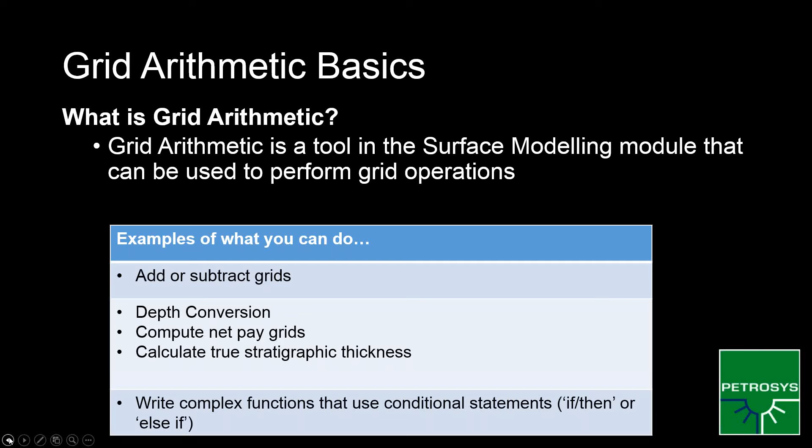This module uses existing grids, so grids that you've already made using Petrosys or .gri files. It also can use constants, which I'll demonstrate, as well as XY coordinates or lists. Your input grids in this module can all have different geometries, but when you go to define your output grid, you'll define a whole new output geometry there.

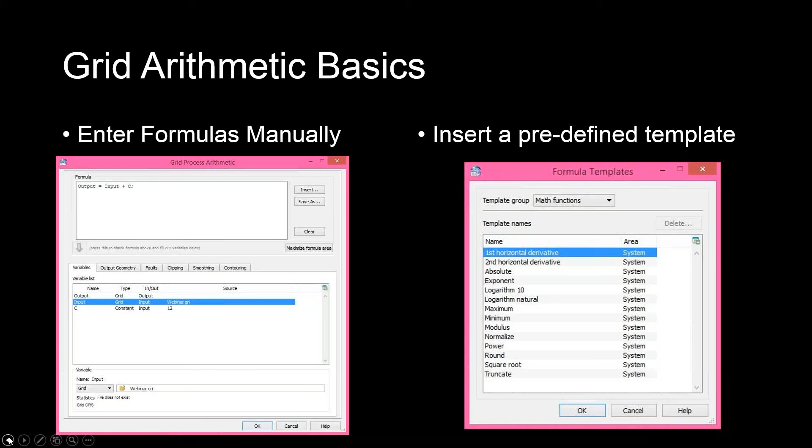So this is what the module looks like. You have the option to enter formulas manually, which can be effective if you are trying to do something a little bit different with your grids. However, Petrosys also comes with a number of predefined templates, and there's a lot to choose from, and we'll go through those briefly during the demo.

So for this particular demonstration, we're going to be using the subcrop formula. It's already an option in Petrosys, and this particular formula has three variables that we're going to be using today. The subcrop is our output grid file, so we'll be naming that and saving that in our Petrosys project directory.

We've got the deeper grid, and this is the grid that is intersected by an unconformity, as well as our unconformity surface. And so we'll specify all of these three variables and be able to run our grid arithmetic using that.

This subcrop formula works by comparing the value of the deeper grid and the value of the unconformity surface at every grid node. And then it's going to take the maximum value of these two and use this value in the new subcrop grid, or the new merged grid.

And you can see here we've got a little cartoon showing you how exactly this is going to work. You can see the deeper grid coming in. It's going to compare those two values and then use the greater one when making our subcrop grid. It'll show up easier in the demo. I've got it all colored out, so we'll be able to see it a little bit better.

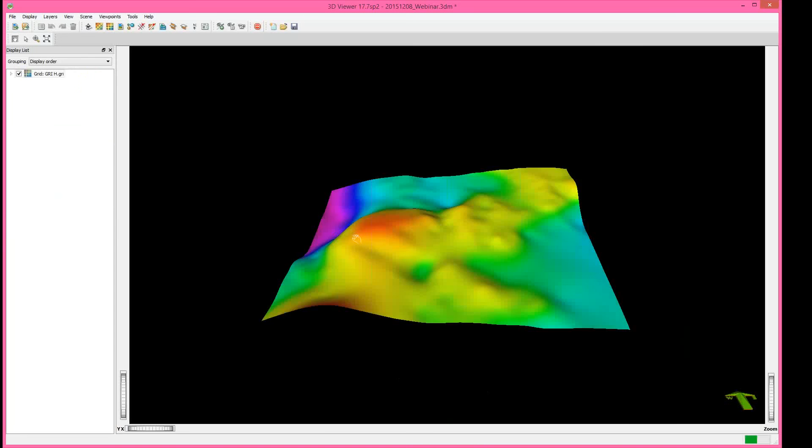I'm going to go ahead and open this. This is just something I made yesterday. Or I guess this is what we're starting with, my apologies. So here in red, you can see that is our subcrop grid. And this surface that's multicolored, I've called this grid H, and it is our unconformity surface.

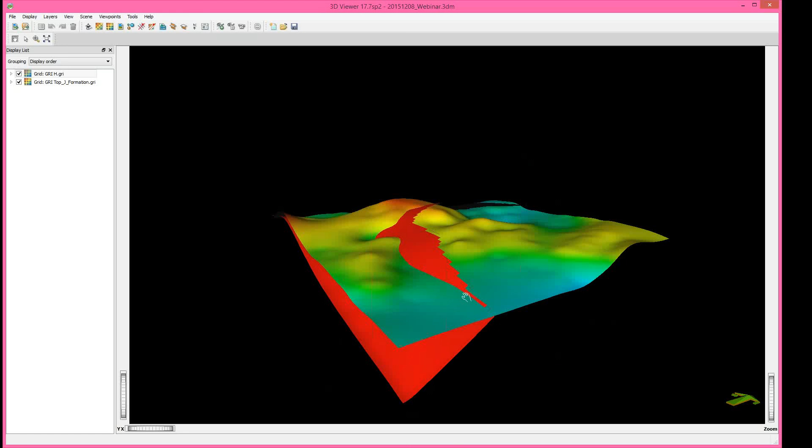So our end result is to take this red grid we have here and merge it with our unconformity surface. And we'll talk about why we want to do that after the demo. So I'm going to go ahead and close that out. To get started, I'm going to open up our surface modeling module.

And to run this grid arithmetic, you want to go to Grid, Processes, Grid Arithmetic. And here you can see all the different options that were in the screen grab in my PowerPoint presentation. But I'm going to go ahead and clear this out. So when you first open this, this is what it's going to look like.

Your formula area may or may not be empty. You have the option to clear it out. And you'll want to insert a template. Here are the templates that I talked about, and you've got quite a few different templates to choose from. If this wasn't a particular demo, we could do math functions. There's depth conversion, simple arithmetic, that's just add, multiply, subtract, divide your grid.

But for this particular option, we're going to use the geoscience examples, and we're going to use the subcrop option. And we're going to do sub C positive. So we'll be picking that formula.

And then when you have your formula chosen and you want to define your variables, you're going to hit this blue button there, and that will bring your variables down here that you can define. I'm going to go ahead and cancel out of this, mostly because I saved a task for us yesterday. So let me get into that.

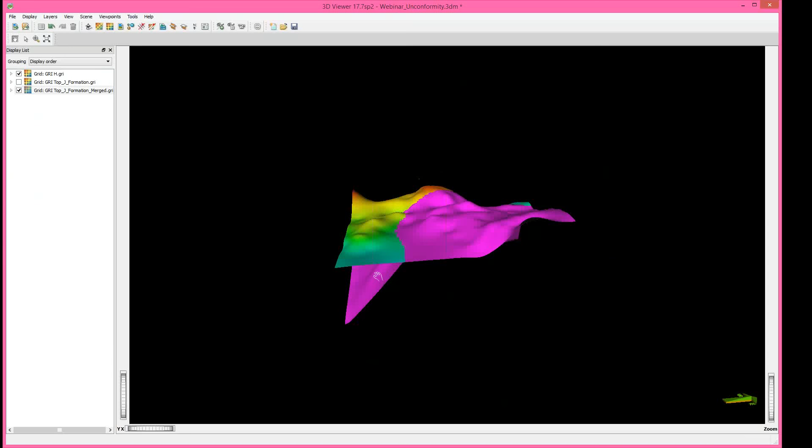All right, so we know that our task is completed. Now I can get back to our 3D viewer. I'm going to go to File, Open. I've saved what this looks like. All right, so if you'll remember, this is what we started with. We've got the unconformity surface and a grid that's intersecting it. But after we've run the task, you can see now that our grid that has intersected that unconformity surface, now we've merged it into one grid. So there's no discontinuities or gaps in here, so I think that looks pretty good.

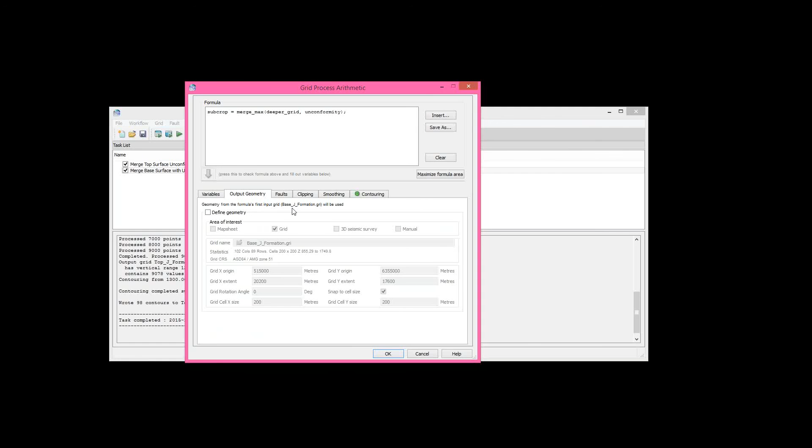All right, so now we also want to merge a dipping surface. So I'm going to go back to our surface modeling module. Let me minimize that quick. And I'm going to open up the second task I have here, and this merges a base surface with our unconformity. So let's just open this up. All right, again, I'm using that subcrop formula, and I've named the subcrop. We're working with a different formation here, so I've specified that in our output. And I've specified that for input, but we're still using that unconformity surface there. So I've specified that down at the bottom. Again, our output geometry is going to use the geometry from the formula's first input grid, and I'm fine with that. And I left the contouring on for this option as well.

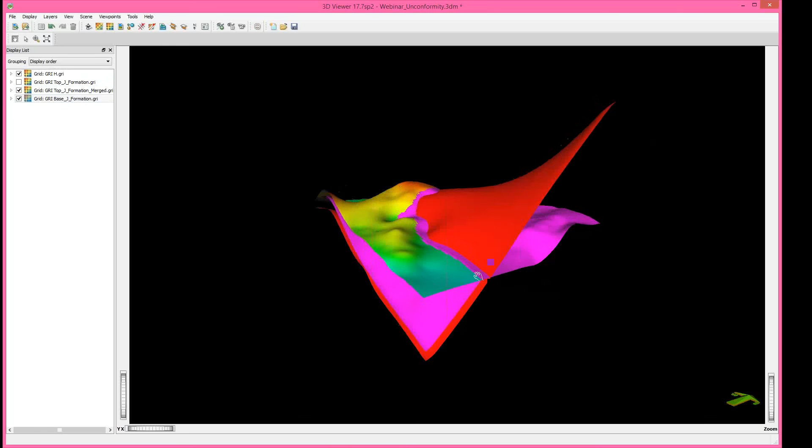Click OK, and again, I want it to run the highlighted task. Click OK. All right, and we see that our task has successfully completed there. Let's get that 3D viewer back up. All right, so the other surface we were working with, oh, let's cancel that. We're going to display this. So we were working with, let me find this here, the base J formation. So this was our dipping plane that we also wanted to incorporate into our merged grid.

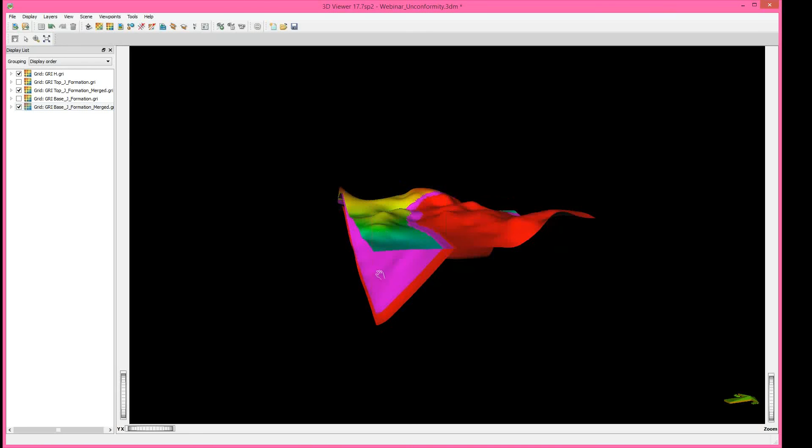And then once we have merged that, so after we ran the job, I can either go File or Display Grid, or I prefer to use this little button right here. We can find that base J merged that I made, and I'll just leave it red so we can see the difference. Click OK, and you can see then how the dipping plane is now merged with our grid and our unconformity surface. And from here, we would be ready to run volumetrics. All right, so I can exit out of this. And we're not going to save changes. All right.

So as I mentioned, one of the benefits of doing this grid merging is it can benefit your volumetrics. So really doing this grid arithmetic is kind of a small but important step in a bigger workflow. So in this particular project, I had these grids. My end result was I wanted to run volumetrics or do a net pay calculation. And doing this grid arithmetic is going to help fix any holes in your grids and also decrease the likelihood for false volumes, which we know is pretty important when you're trying to give results. You want to make sure that your volume calculations are as accurate as possible.

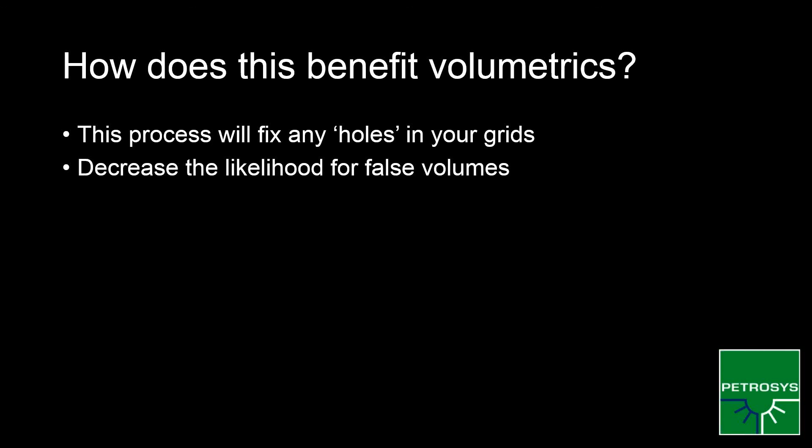So just to recap, we talked a little bit about the grid arithmetic theory. This again allows users to perform mathematical operations to their grids, anything from basic arithmetic to more complicated if-then statements or conditional statements. And in Petrosys, we have pre-built templates, but we also have the capability for you to make your own templates if you want to do some different sort of math or different sort of grid manipulation. And then we also talked about using grid arithmetic to solve unconformity problems by creating a subcrop grid from your unconformity surface and from your original grid. And then I hope I was able to accurately demonstrate that with the brief demo.